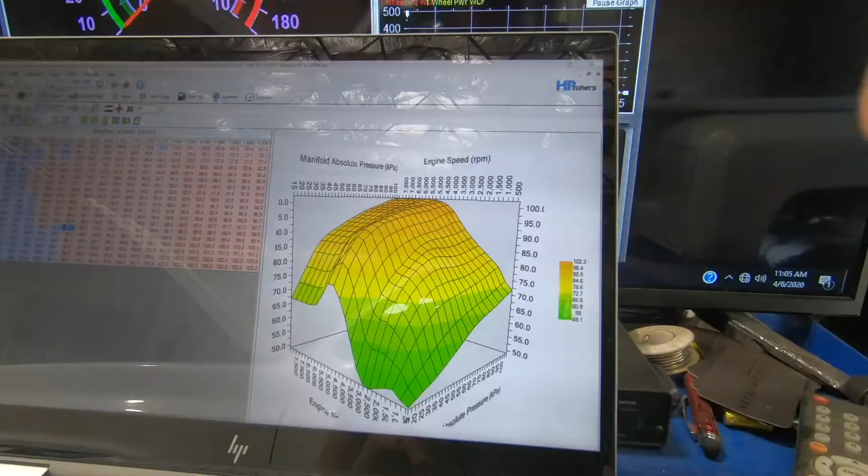So this that you see in front of me is considered the VE table, or volumetric efficiency. You can see right here, there's the amount of air percentage that's going into an engine at certain RPMs and certain MAP pressure. That being said, this is pretty much dialed in. Fuel trims are around -3 to +3 in this areas. So we're usually around this area, and then we're gonna be around over here at wide open. This over here is pretty much flat because we're not gonna see those RPMs anytime soon. I mean, we're not revving the engine up to 7,750. It is just a 5.3. So this is the main area that we will be working around.

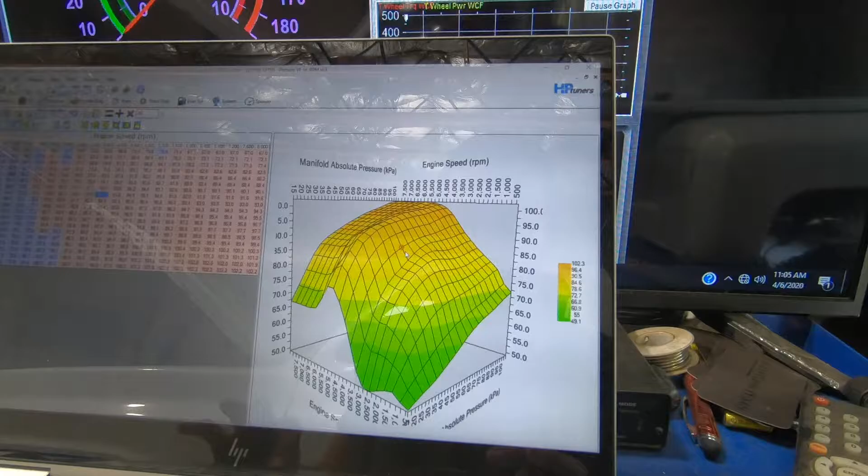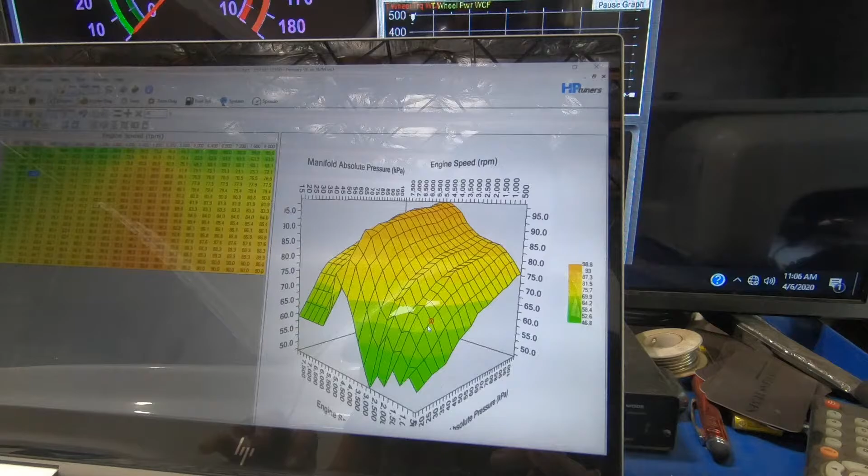And then this one over here is the stock VE. They did do some minor adjustments to get the car to start with the cam, not too crazy, but you can see it's a little lumpy. This is pretty much what comes out of the factory. So then again, once you hit 4,000 RPMs, once you're in this area, it starts going into MAF. So it's just a little bit of the cleanup that I always like to do.

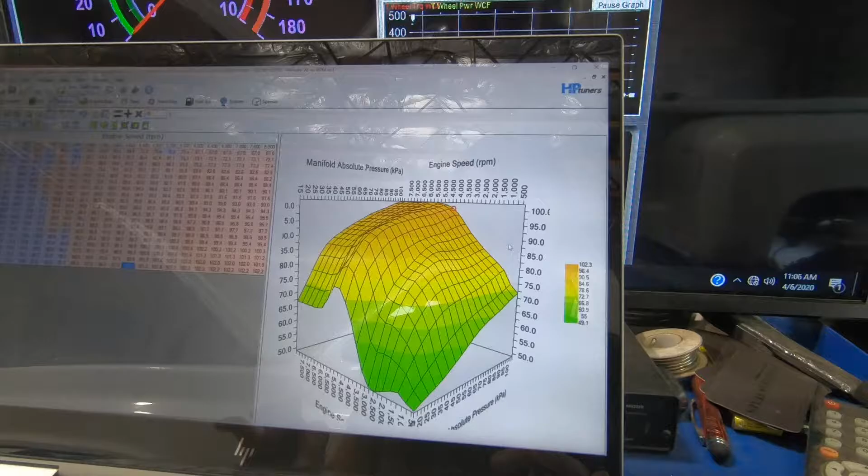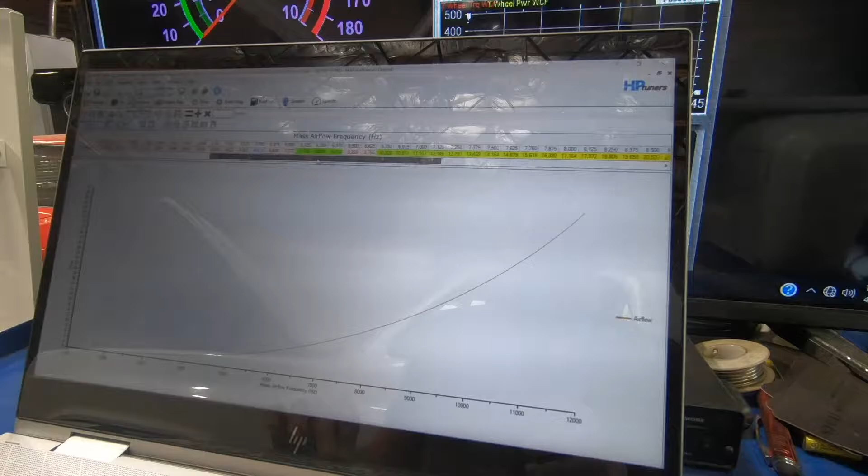And then this is the MAF curve. This one is very important, because this is what we'll be using when we're wide open. So I still haven't gone wide open in the truck yet. That's what I'm about to do right now. But that being said, once you have your MAF and your MAP or your VE working together really smooth, you get the best drivability you can get out of these cars. Obviously you can't expect like stock drivability when you have a bigger cam. Luckily for this guy, he is running a 3200 stall, so that will help with the loss of low RPM torque. But besides that, we're about ready to go wide open.